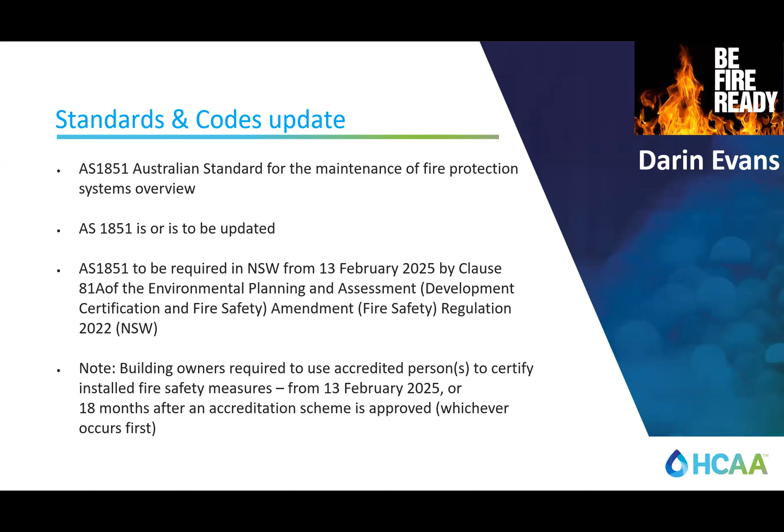I've also put a note in there. We're also getting accreditation of measures being installed in the building. Again, this only relates to the fire measures, but those fire measures will now need to be signed off by an accredited practitioner, which makes sense. At the moment, an accredited practitioner or the like needs to do the design of most of the fire safety measures in the building, and we do annual certification on it a year after the place has been completed. This one's going to apply to the one that occurs for the occupation certificate. I've got a couple of slides on what it means, and that's the little piece of the legislation coming out there.

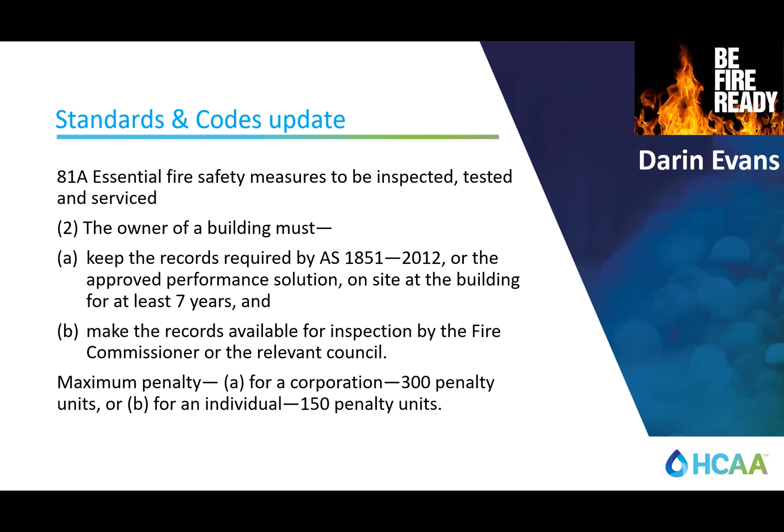So if there's a performance solution, obviously that goes over the top of 1851 to that extent as well. And you've got to keep the records, so people will be able to access those records for a 7-year period, most likely the fire brigade or an insurer, or someone looking at what's going on. And that's the final part of that clause there.

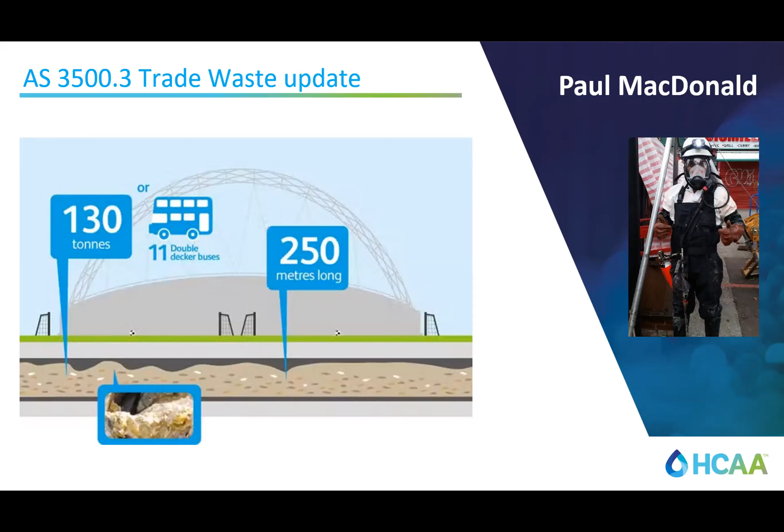And we should also be noting on our documentation that the contractor is responsible for all trade waste applications, as the information that is requested asks the type of plaster arresters being installed, the types of silt arresters being installed, and the types of grease arresters being installed, etc. And all this information is what the contractors would have on hand. I believe these items may end up on Dean Crowe's desk, but we'll see. That's a quick update from Paul MacDonald.

I'm going to ask Stephen to come up. So please welcome Stephen. Stephen's taken over from Rod temporarily, and Steve's going to give an update on education. Thank you.

Good evening. So I wouldn't say I've taken over from Rod. Rod is one that is very active in the education committee. So Rod put his hand up at the end of last year and asked for some help. He's been fighting this fight and pushing this slog for a very long time to get the industry up and running. And the biggest challenge has been for a number of years and still is a lack of teachers.

So our biggest message to the industry is we need more help. And if anybody is at all interested in teaching, then feel free to reach out to myself or Rod. We'd be happy to have a chat. My role, I'll be involved in just handling day-to-day inquiries and basic sort of first point of call.

In terms of an update, I work for a German company, so I thought I'd give an update with some statistics, which tends to go down well. The diploma course at the moment, we have 30 students that were enrolled earlier last year that are due to finish mid next year.

We've just put through another 15 for the Cert 4 prerequisite for the diploma, which will also finish June next year. Come July next year, there'll be a second class run for the diploma, so another 30 or so students will commence. But between now and then, unless we get some additional help or more teachers, which TAFE is working to achieve, that'll be the earliest the next cohort will run.

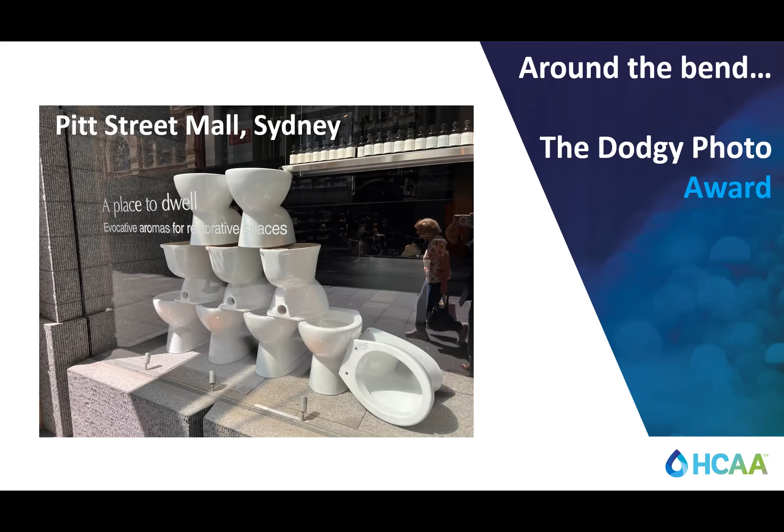And it also kind of leads on to this item here. I'm going to ask Mr. Matt Lloyd to come up for the next slide. So Matt posted this on LinkedIn. I think it was on, when was it? It was International Plumbing Day, wasn't it? World Plumbing Day, yeah, on Friday or Saturday. I'll hand it over to Matt.

Thanks, Paul. Yeah, it's kind of been thrown on me 5 minutes ago, but anyway, I put this up on LinkedIn and was actually surprised at the response, it's been pretty big. I kind of thought, I wonder how many people in the industry remember dealing with these, possibly even specifying them, Gary. But yeah, certainly everyone to a degree, and it was really interesting to see some of the younger people in the crowd come up and have a look at it.

Look, I'd like a few people to throw a guess at what they think that weighs, because that was the intent of my questioning on LinkedIn. There's been some close ones, but I can tell you 45 kilos was not anywhere near it. If you remember a 40 kilo bag of sand cement, that was quite heavy, but that's what we were throwing over our shoulders at one point. I sort of came in at the tail end of this, I can't be a champion of it really, but I certainly remember cracking beers on site, using 9-inch grinders and carrying these around, but PVC was certainly coming in, so the plastic guys will be pretty glad to hear that.

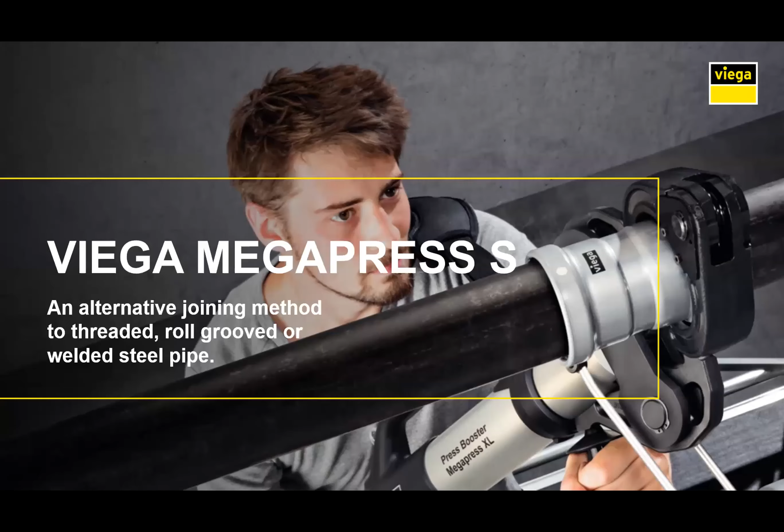3 minutes, me again. Emily and Paul told me I had between 3 and 4 minutes to present this, and those who know me know I can waffle on, so this is quite a challenge for me. I'm going to keep it short and sharp, or Paul's going to tackle me off the stage.

For this innovation segment, I'm presenting a new technology that Viega has launched in the market called MegaPress. It's a press fit system for carbon steel or for galvanised steel. I'm mostly speaking to those in the industry who dabble in fire, although we predominantly sell it for mechanical services as well. It's simply an alternative joining method to threaded, roll groove, or welded steel pipe.

As you can imagine, press fit is a lot quicker. So there's a lot of flexibility you can have on site using the jaws, nice and quick, and not as cumbersome in terms of labor and bolting, threading, machinery, etc.

We predominantly sell it into mech services and fire sprinklers. There's also some applications in shipbuilding which we get involved in, and potentially we could do hydrant systems, but speak to me about that first.

The way the system works, for those familiar with press fit, it's the same technology as your 100 mil copper. We have stainless steel grip teeth which bite into the pipe itself, and that's what provides strength as it presses the two metals together. There's a sealing element separated by a separation ring to prevent any sharp objects from damaging the seal. We have a full range of fittings from half inch up to 4 inch elbows, tees, couplings, and the body of the fitting is coated in zinc and nickel for corrosion protection.

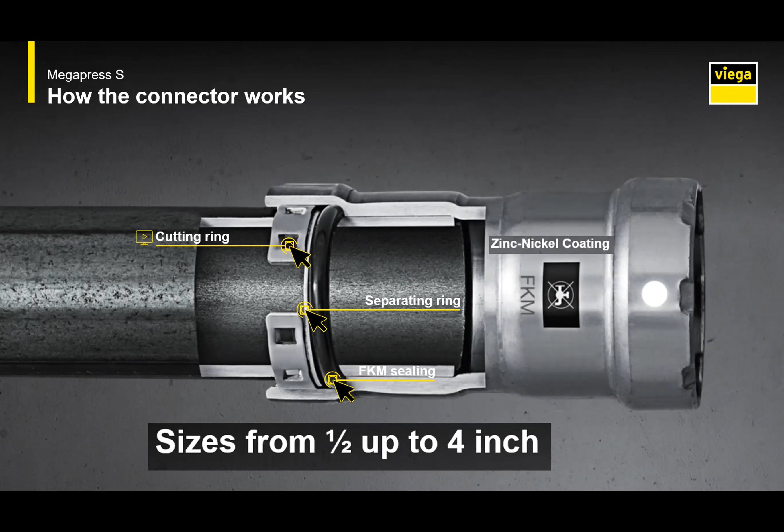With all our systems, Viega have leak detection. We call it the Smart Connect feature, but whether it's our copper, plastic, poly, stainless, or now carbon steel, we guarantee that if a contractor fails to crimp the fitting between a pressure range of 100 and 650 kPa, the system will visibly leak, and you're guaranteed not to miss that during your testing phase.

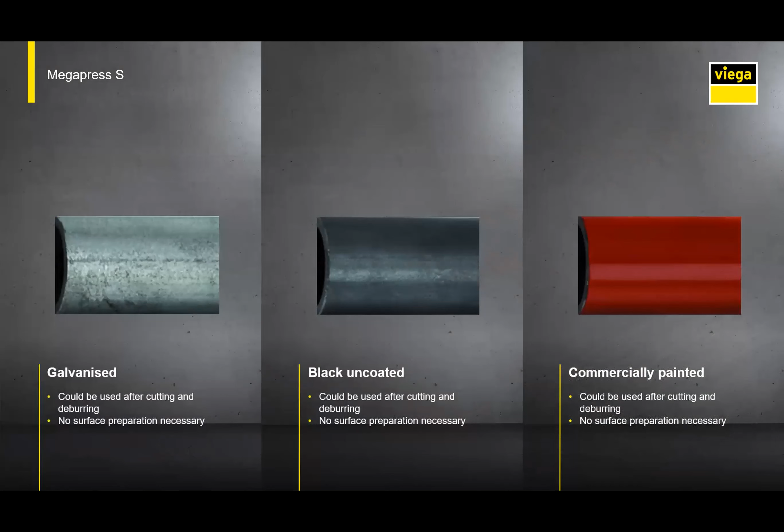It's a thick-walled system, so it is suitable for Schedule 40 mech services following the US standard or the Australian standard 1074 light, medium, heavy-duty pipe. Can be used on galvanised steel, black uncoated, commercially painted, or even rusty steel, so long as you appropriately clean it, prepare it, and file it back.

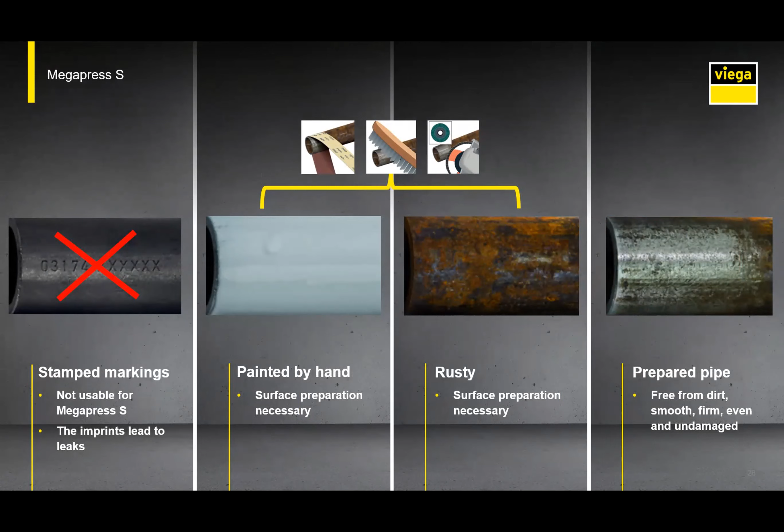And I said I'd be short and sharp. That's the system. I've left some samples over here. If you have any questions, that's me.

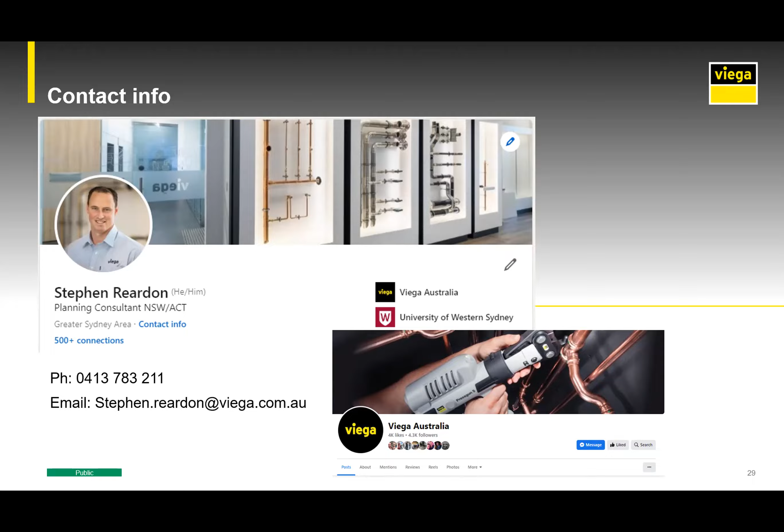Good evening, ladies. Four minutes. Four minutes, fantastic, get it cracking.

All right, thank you for the opportunity. Welcome to our first seasonal general meeting and dinner. I'd like to get straight into this presentation: the Geberit BIM system, building information modeling system.

You're all familiar with the Revit system by Autodesk. This system plugs straight in and is operated through the system throughout. It's based on the Swiss system, which allows any region, once you log in, to give you access to any online catalog, which will give you instant data on the products straight away.

I'll run a quick video for you. Keep it quick.

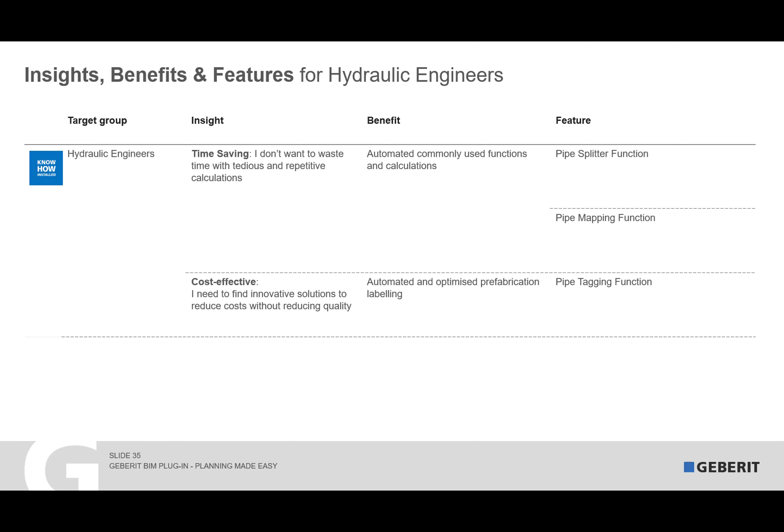So I'll finish on a video which probably will give you a bit better information.

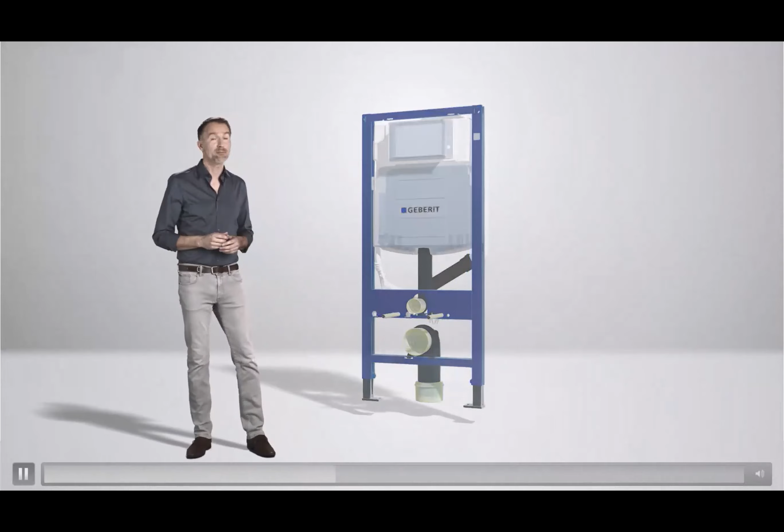Everyone is talking about BIM, and it's true what they say: networked digital planning in 3D promises all-round efficiency and excellence. Nonetheless, a huge gap still exists in many cases between theory and practice. We at Geberit are closing this gap with BIM now - not sometimes, somehow, but very much here and now. The complete array of Geberit items for your planning software, in accordance with country-specific and market-specific standards, with reduced practical data models and comprehensive meta-information available as required, naturally in standard formats in international use, to ensure easy handling of our data independent of systems and software. The Geberit plugin for Autodesk Revit provides you with rapid access to all Geberit products. This means you have all the essentials close to hand and in compact form, from the simplified model all the way to all of the relevant data once the planning is completed.

Theoretical and practical, simple and standardized data, useful standardization that is through building smart or intensive exchanges with research and economics institutes. We are on top of the situation. The future happens every day. BIM now.

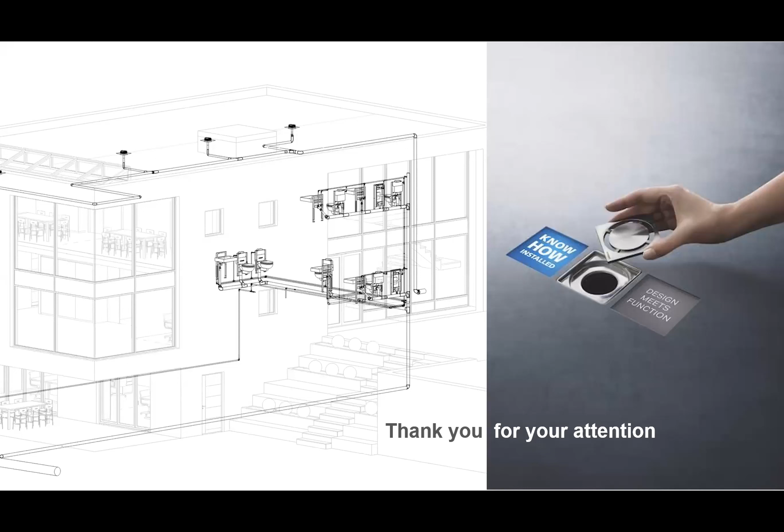So just in wrapping up, if you have any further questions, I'm here tonight with my colleague. If you have any questions, please come and see us before you go, as time is of the essence. I'm more than happy to come out and show you one-on-one or for your groups as well. So thank you very much for your time.

Fantastic, John. Thanks, Scott. So again, just to reiterate what I said before, if anyone's interested in doing this, we're going to have probably 2 or 3 at each meeting. So it's an opportunity for all the affiliates to get involved and for our consultants as well.

So I'm going to skip. Oh no, we're not having anything to eat. So this is before we have something to eat. This is all about, again, the benefit of the affiliates. And the question that I posed here is, you're passionate about your role because of what? So everyone get up on their feet. All together now. And we want everyone to mingle a little bit and just tell them quickly, in that 30 seconds or a minute, what are you passionate about and why?

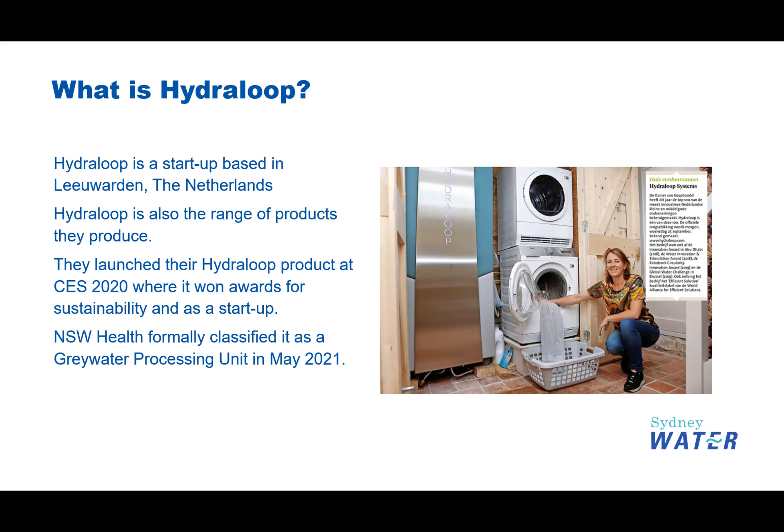Neil Shaw from Health picked up the water quality analysis that they'd done in Germany to comply with the European grey water equivalent standards. And he very quickly realised that this is a big game changer in the industry. It was a totally novel approach to grey water treatment. And he coined a term, grey water processing unit, GPU. Just remember that, I'll come back to it later, but that was a very clever move of his, because there's no such term in the Australian standards. He recognised that the Australian standards do not consider this approach.

So when Sydney Water got interested, first thing, my background is all in water efficiency. I've spent 25 years at Sydney Water running and developing water efficiency programs. So I'm not a plumber, but I interact with plumbers on a regular basis. One of the programs we run, Waterfix, has employed 60 plumbers for nearly 20 years, fixing taps, toilets, showers and leaks in households. So we actually have a fairly big plumbing business, and we trade probably $8 or $9 million a year in that Waterfix service. In the first 18 months we did 127,000 houses, in the middle of the millennium drought. Anyway, so that's my background.

But first thing we did was look at our end use study. We've got about 200 houses that are on high frequency metering, so 15-second meter reads. So we can work out the end uses in the house. We get a trace for every shower, every tap use, every basin use. We use Griffith University to put it through an algorithm that can split the trace up and work out what is what in that very complex trace every 15-second reading.

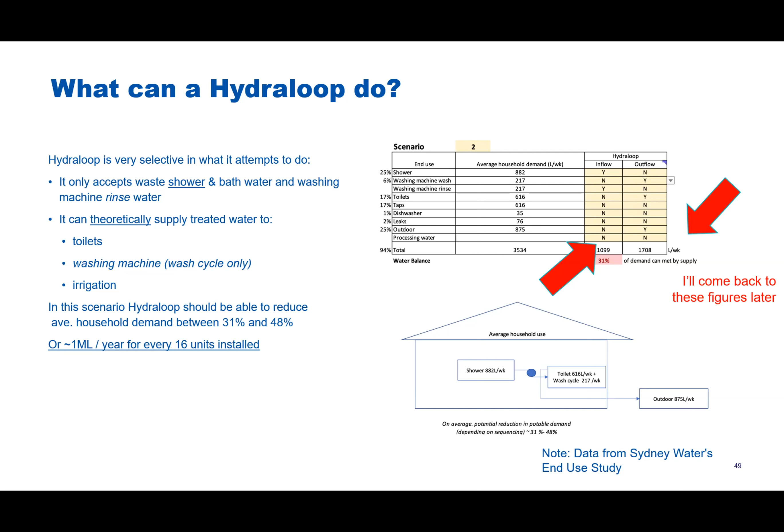Okay, very few moving parts, very unlikely to break down. Fully biological process, no filters, no screens, no chemicals. So it's a bit of a game changer. It's a pretty simple process, and I'll start drilling into exactly what it does.

But the first thing for this room is the plumbing is quite different, and we're going to have to slowly change the perspective of how household plumbing is done if they're going to be recycle ready, is the term that Hydraloop have used for equipping a house ready for this to be connected. The shower water, for instance, has to be separated from the floor drain, the toilet, and the basin in the bathroom. Shower and bath should be separate and brought down to the position where the Hydraloop is.

Toilets, just like rainwater tanks, the toilets are supplied by the Hydraloop, not by mains. And there's an irrigation outlet, and I'll get to how this works as well, but there's a Hydraloop irrigation path from the Hydraloop as well. So there's 3 outlets. And sorry, the second one is to a washing machine. It will service the washing machine as well.

Underlying feature, and again, this is why Neil Shaw distinguished Hydraloop from anything else, is it sits in the home. It utilises the thermal envelope of the home. So the warm shower water and the fact that the houses sit around 20 degrees accelerates the biological process. It's not in a hole in the garden or outside. Therefore, it's designed to have a permanent connection to the sewer. It sits on top of a sewer connection, and it has a backup water supply, which can be rainwater or mains.

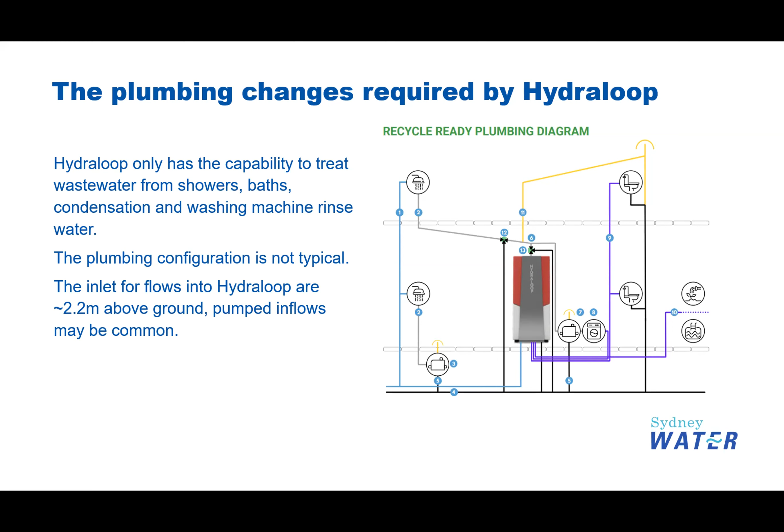Water quality is surprisingly good for such a simple system. It's very clear. The process does not remove salts, is its weakness. That's why it's still only a grey water treatment system. It's not a black water processing or treatment system. It's only ever going to be good for washing machine wash cycle, toilet flushing, or irrigation. It's full of salt. Biological load is right down to the minimum. But there is going to be a small biological population, so you can't just put it back into a rainwater tank and leave it in storage, because eventually that will bloom.

The process is there's 2 tanks stacked on top of each other with a central column as well. There'll be some photos of the Hydraloop later in the presentation, but essentially you've got a total capacity of 300 litres, top tank 180 litres, bottom tank 120 litres. Most of the processing happens in the initial column. There's a lot of screening and aeration that goes on to reactivate the soaps in the detergent in the wastewater, and that starts a process which is called foam fractionation.

So basically, anything that's even quite microscopic, but certainly anything quite large, actually floats to the top, doesn't settle to the bottom. There's a lot of aeration happening in this central column. And there's just a really simple, non-movable sloped surface at the top of the inlet funnel, and it's got the bypass to the sewer. So anything that can be carried by an enormous amount of bubbling, there's aeration pumped in at the bottom, is carried upwards and skimmed off naturally. It's not a moving part. It's just the design of the inlet funnel, basically.

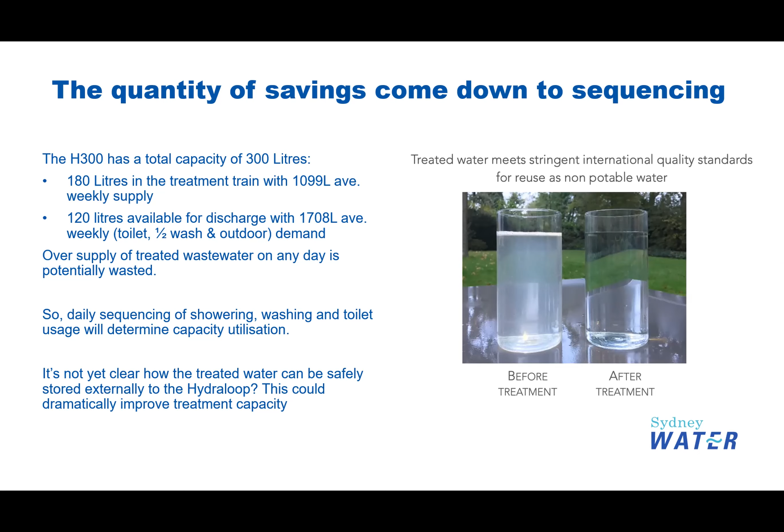New South Wales Health published Ad Note 7 in response to Neil Shaw's evaluation. It's available on the web. The distinction is that the Hydraloop or grey water processing devices, of which Hydraloop is one, don't produce biosolids. It's got that direct connection to sewer, so it's inherently fail-safe. It's not an end-of-line system like the old septic tank conversions and so forth.

This is in the house, sits on top of a sewer connection. So any failure, catastrophic failure or anything, just goes straight to sewer. And it's got a backup mains supply or rainwater supply. So even if there's a mechanical failure in the bottom tank, mains supply will take over.

Being Sydney Water, the story is that one of our GMs saw Hydroloop's press after the CES, and I got the task of importing 30 of the units, so a container full of the units, 30 fit in a container. So we have 30 in the country since the middle of the pandemic. Basically, it took about 9 months to get here because of the disrupted shipping.

And during that time, we engaged our internal lawyers to do a canvas. What regulations do we have to comply with? Very quickly, we found it cannot comply with any of the existing grey water treatment or processing standards. One of the key terms you have to comply with is the lid must be trafficable. This thing sits above ground in a house. There's no way it's going to have a trafficable lid. That's among many other aspects of the existing standard that we can't comply with.

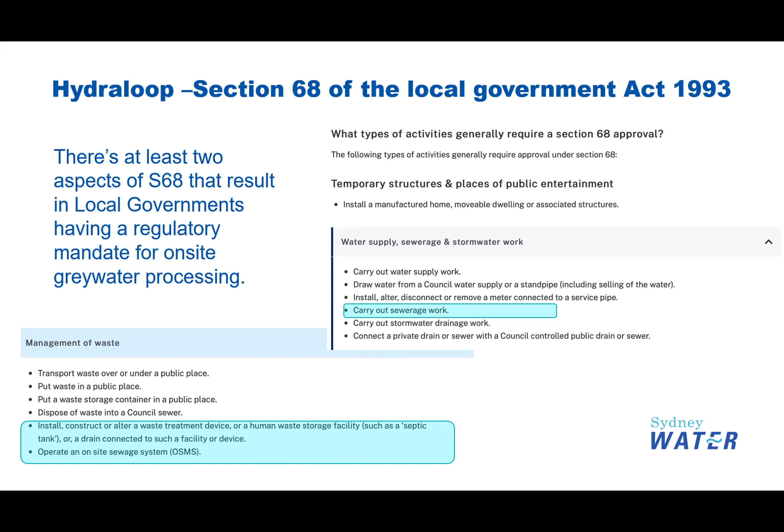Yet the water quality results exceed the requirements of the existing standard. That's really where the rubber hits the road. But we also get pulled up in the Local Government Act in Section 68. So eventually in the future, local governments will be the ultimate regulator, not Health or the EPA in New South Wales. In Victoria, the EPA take carriage of grey water, and in New South Wales, Health take carriage of grey water. So we don't know what the outcome will be in Victoria yet.

Something I'm sure you guys are well aware of, but I certainly wasn't when I started this journey, is we had to commence our trial, and it's not a WaterMark product, it won't fit into the Australian standards, it's not recognised, there's no pigeonhole for grey water processing devices to fit within the WaterMark. So we have to go back and reinvent the wheel and start that process from the beginning.

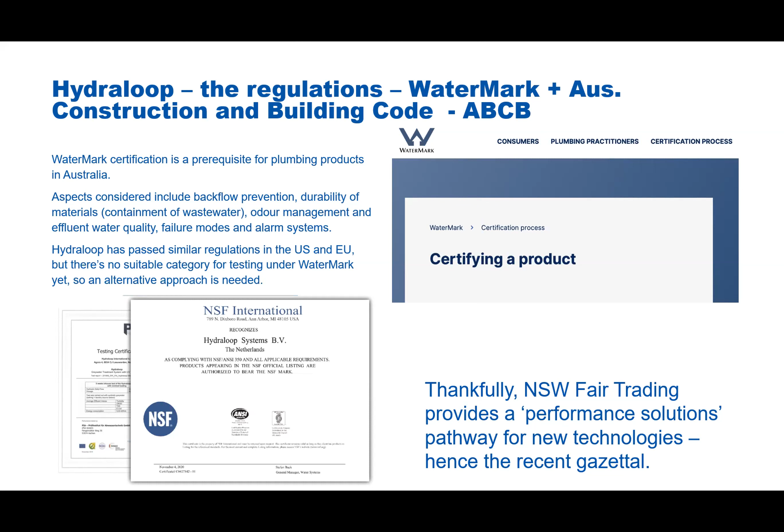Thankfully, the existing 1540-something standard for grey water treatment systems was up for its 10-year mandatory review anyway. It was 9.5 years old. So I've got myself on that committee, and we're slowly working through updating that standard to allow grey water processing devices. So we went down the path of a performance measure, and we got Gazettal. I'll skip through this. We got the Gazettal on the 4th of November last year. So that was like a 9-month journey getting that approved by Fair Trading.

Last bit of regulation is in Sydney. AS 3500 says that if there's a backflow device within the unit that's compatible with the hazard it presents, as a medium hazard risk as defined by AS 3500, and Hydraloop included an air gap device which is suitable for that hazard. AS 3500 says if that exists within the unit, then you don't need upstream backflow prevention.

But Sydney Water says if you've got any grey water processing on site, you need testable backflow RPZ. So this is a bit of an unfortunate policy mismatch with the standards in Sydney Water's area of operation. So it means there's roughly a $300 annual testing regime that householders will have to put up with until I can convince James to change his policy.

This is a couple of photos of the air gap device. The left-hand shot is sort of an overview of the guts of the Hydraloop. This is where the pump is in the bottom left-hand corner, the UV lamp on the top right, the vertical system. The grey pipe across the top is the bypass to sewer. There's also some solenoid valves and so forth you can see in there. And the air pump's kind of stuck in.

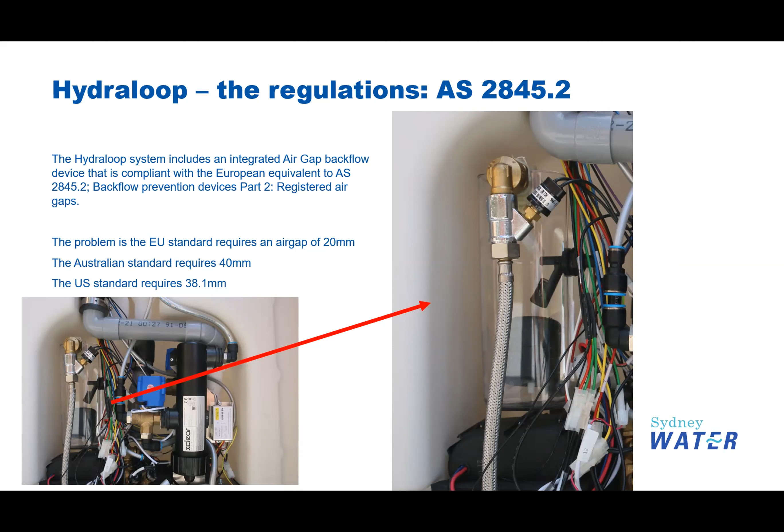So Hydraloop are busy going through the process of getting their air gap device certified under 2845. So we're slowly building the bridges to get it compliant with a future WaterMark certification. A couple of photos of the inventor.

So Arthur Valkieser and his wife Sabine came out to Australia in October last year. Arthur's a serial entrepreneur. His first big break was when he was in his 20s. He invented a communications device for aircraft that is the last thing if you've got a complete system failure in any aircraft, whether it be a fighter plane or a commercial plane or a Cessna. If you've got complete system failure, his little box, installed in every single plane that's ever flown since the 1960s, will guide you via radio waves to your nearest airport.

He's a self-made millionaire because he's the inventor of that. He still produces every single one himself in his own factory, and he gets all the royalties from that. Not a bad gig. So he didn't need to invent Hydraloop. That's the point of all that. He did. It's a bit of a passion project. He saw wasted water as an issue, and this is in rainy Holland, northern Holland. And so it's a very well engineered device. He's an engineer by heart. Very simple design, very impactful in my view.

We proceeded down the path of getting some installations underway. None of these have been fully inspected yet or anything. They're not functioning yet. They just got early commissioning stages. We've got some social housing projects. We've got 2 houses in Willoughby, a passive house in Queen's Park. Eventually we'll have 30 installed.

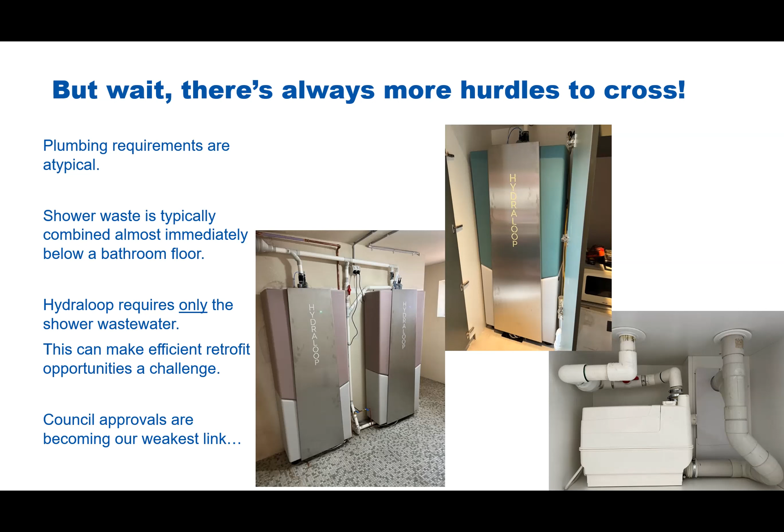I live in an 1850s terrace and it's before plumbing. And so all the plumbing is outside the building, inherently easy to untangle that plumbing, and I'll be installing a Hydraloop in my place. Any kind of major renovation typically involves bathrooms or kitchens. And so once they're being replumbed, it's relatively easy to sort the plumbing out.

One of the more interesting ones was a social housing project in Glebe. This is on Bridge Road, Glebe, just up from Glebe Point Road. This was all done during COVID. I don't know whether you recall, during the lockdowns, all the homeless men and women were put into hotels to keep them safe off the streets. And as the lockdown started winding back, there was a concerted effort to find homes for all these previously homeless people, with mental illness, all sorts of issues that caused them to be homeless. This was one of the solutions.

So various agencies had bought dilapidated properties, upgraded them, and this building here is 30 units, 30 studio apartments. It used to have communal laundries down in the basements. Part of the renovation of this building was to convert one of the bathrooms in the studio apartments to a laundry bathroom. And so the communal laundries down in the basements were available. And of course, all the drainage used to come down there to that level anyway.

And these walk-up units, of which there's roughly 35,000 in Sydney, their slabs are so thin, I'm sure you know this, the plumbing goes straight through and hangs underneath the slabs, just in a duct in the downstairs person's bathroom. So you take that duct away and you can untangle the plumbing, separate the showers from everything else. And that's exactly what we did.

So this building now has, and what's unfortunate, it's on a bit of a hill. So there was only the basement on half the building, under 15 of the 30 units. So we're only servicing half the building, unfortunately. But we've got 4 Hydraloops servicing 15 units, half the building. And again, they're not fully commissioned yet, but they're in place and plumbed in and ready to go.

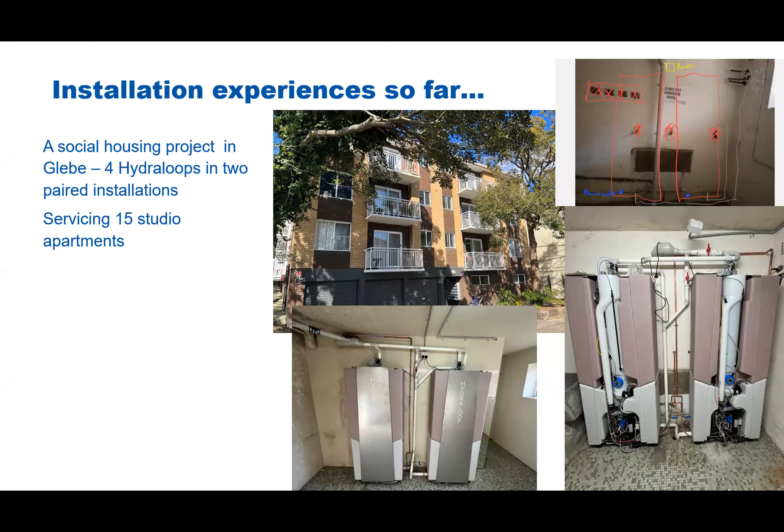We're still waiting on some final council approvals.

This is just some photos of the passive house in Queen's Park. Very complex build, ventilation systems going all over the place. In this case, the Hydraloop was chosen to be installed in the attic. They didn't want it taking up cupboard space downstairs. It's a Federation era house, so 1900s and 1910s.

So they've got a pump there for wastewater. They've got a little DAB lift pump in their laundry, lifting their shower and washing machine water up to the attic, and it's accessed on the very left.

This is the child's bedroom, through his wardrobe. There's a little hatch at the back, and that's to an attic space, right? So that's how you get to the Hydraloop. It's the most compact place possible.

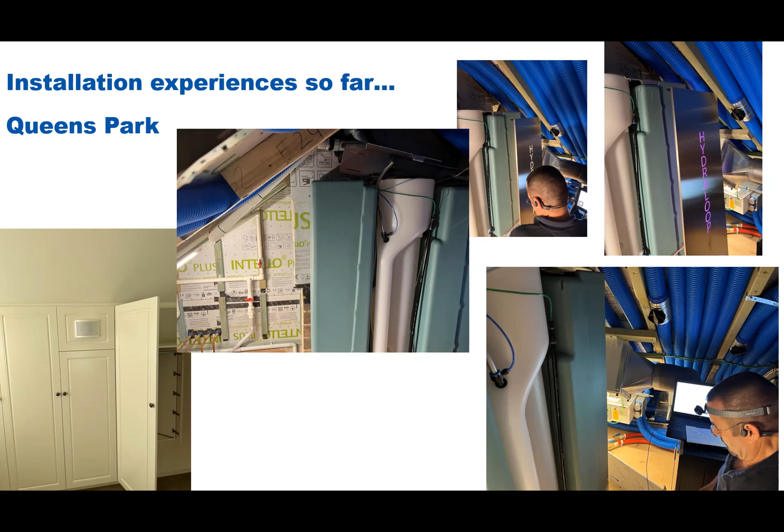There's another one in Willoughby, an outdoor installation that will be built into a cupboard. I've just shaded it in purple, roughly where it'll be. This was an old 1930s, 1940s house, double brick, but they're replacing both bathrooms, so it's inherently easy to retrofit the plumbing and the laundry. So this will be another retrofit.

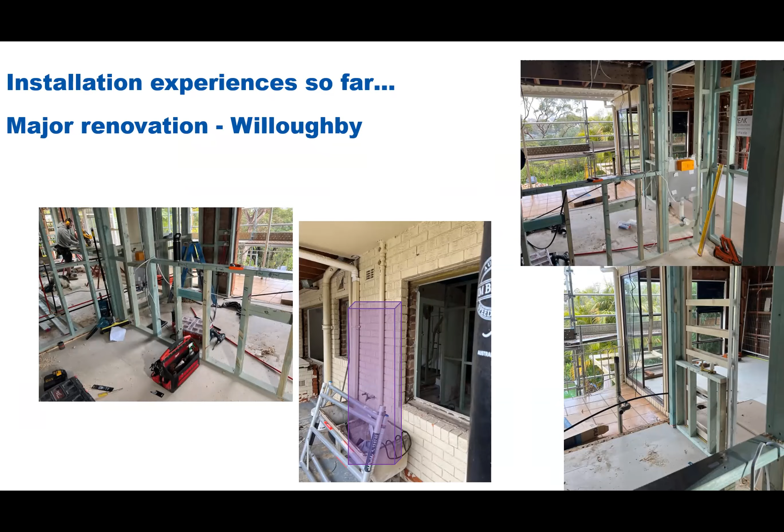And when you think about it, Hydraloop have always chosen the cleanest, biggest volume grey water supplies in the house. They're not trying to get kitchen wastewater, or the basins. They're just getting the high volume, and also the temperature - the warm water is what helps drive the biological process quickly.

There's a process called foam fractionation, which is really adopted from the pharmaceutical industry. It relates to foaming, but it's that biological process already breaking down in the first seconds because of the foam. Then the big tanks really are aerobic bioreactors, oxygenated water. There's air going into it all the time via a little aquarium pump, and the bio balls are serrated just like tennis balls, with a really rough surface area, but they're hard plastic. The idea is the surface area gives maximum surface area for biological activity to take place. So it's just a warm, highly aerated tank, and biological activity is going to take off.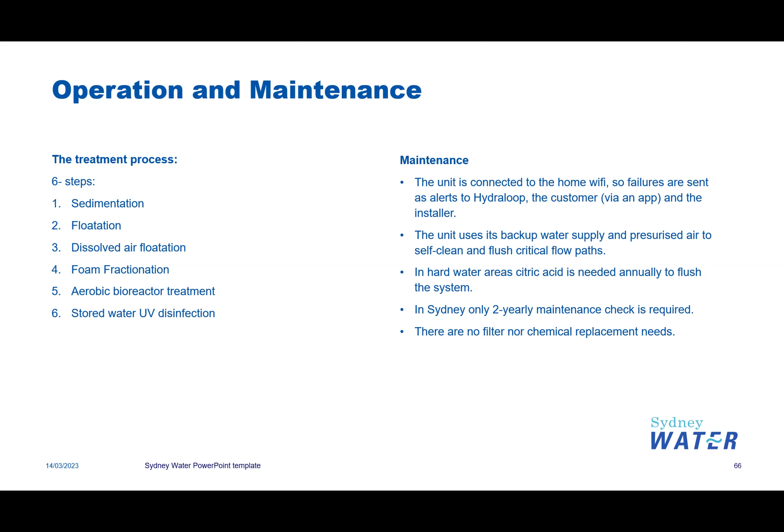The other key attribute of Hydraloop, and this is really where the rainwater tank industry needs to learn, compared to any other onsite or decentralized treatment system, is that it's connected to home internet. So the consumer gets an app, and we get a view of what they call a Hydraloop device manager, which is a global view of all the units installed.

There's about 60 sensors in each Hydraloop, so you can see all the levels, all the flows, any sort of fault diagnostic. Everyone gets alerted - the installing plumber, Hydraloop back in Holland, and in our case, because we're running the trial, Sydney Water will see the status of these units as well. The customer obviously will get a notification if there's a failure.

Last slide - there's always been a question of what's the energy use. There must be a downside somewhere, and it does use a bit of energy. It's got a UV lamp, aeration pretty constantly, and a DC pump. So that equates to - and where I've got the data from, Hydraloop haven't been particularly forthcoming with the energy use, I don't think it's something they've considered seriously.

But when they did the water quality testing in Germany, it had to go for a 5-week test period, just like the Australian standard requires a 12-month test period to evaluate it over time. During that 5-week test period - this is a copy of the certificate from the German lab - it used on average 0.55 kilowatt hours per day. Translate that over a year, it's 200 kilowatt hours... sorry, for an average household, that's about 11% of household demand. So it's not insignificant, but it's not a major use.

Those of you who were here for the last meeting, a geotech colleague of mine, Jason Bauer, gave a presentation about the characteristics of soils and what determines reactive and unstable soils, which was a pretty informative precursor to this new appendix that's gone into AS 3500 Part 2 last year. That appendix is pretty much a section of another standard, AS 2870, which has been around for quite some time, and I've been on two previous committees trying to get that information brought over into AS 3500. Finally, the last committee that had a crack didn't quite get it into the normative section, but it's in there now as an appendix.

So tonight I'll focus on what is in that appendix. But just before we get there, as an introduction, the problems associated with reactive soils that move, not just from a plumbing perspective but a construction perspective, is pretty huge.

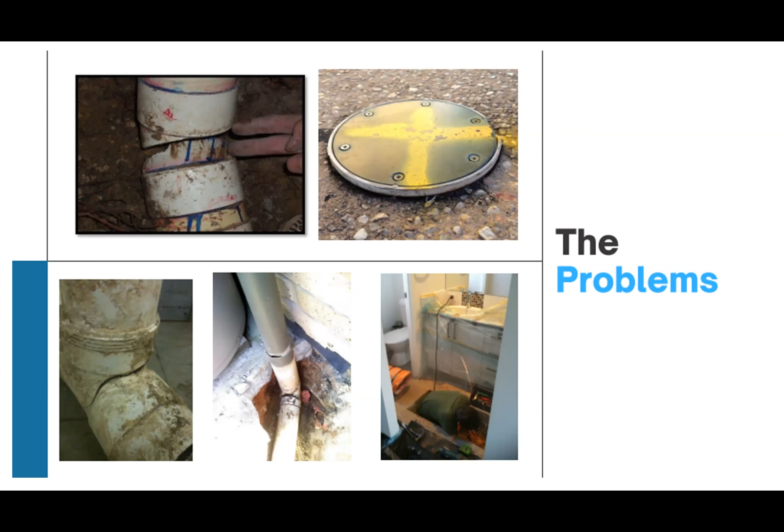This is a good example. Where I'm from in Queensland, we have the QBCC, the Queensland Building and Construction Commission, the state's watchdog. When things go wrong, the homeowner complains to them, and the first thing that happens nine times out of ten is they send a camera guy out to camera the drain. This is when the homeowner complains about cracking walls, doors that can't shut, and those usual signs that a structure has moved.

I've been working with one company, Ben Theslow from BT Plumbing. He's been the camera guy for the QBCC for 15 years, and he's provided a great deal of really good data which has helped us develop products in this field. This particular example is a block of 13 townhouses on the north side of Brisbane.

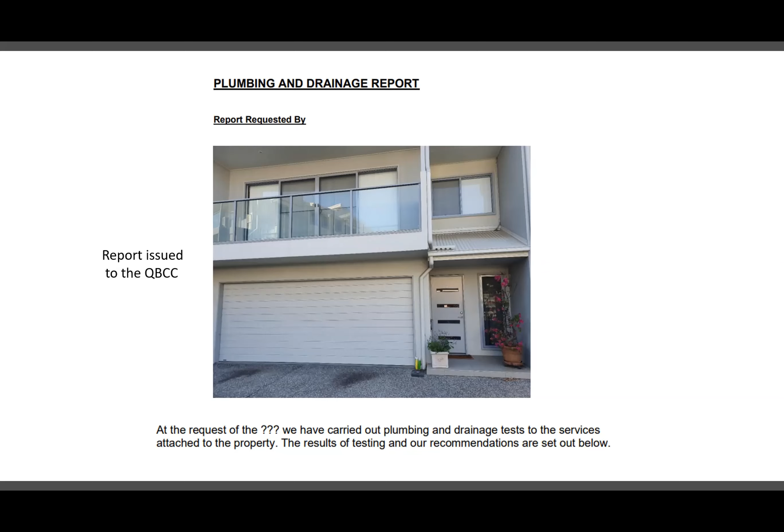Construction date was about 2017, and homeowners started making complaints two years later. In 2019, Ben went out and cameraed this drain. I'll go through this quickly, but this is the same report he issues to the QBCC. He always does the stormwater drains first, and downpipes were obviously broken out the front of the building.

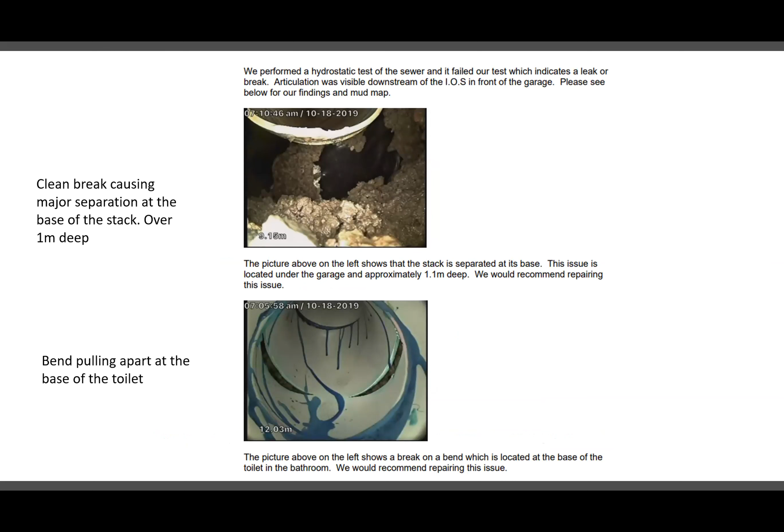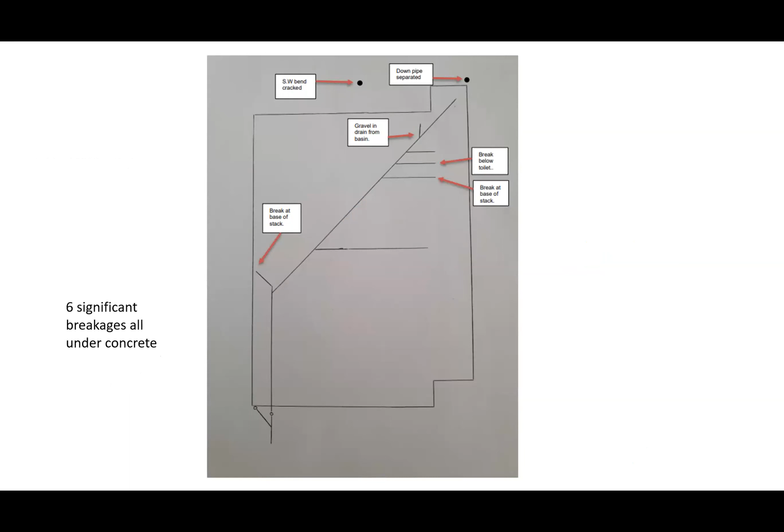There's an ORG there, and that's the mud map he did for the first townhouse. There were 6 breaks in that one, and I'll quickly go to the next adjoining townhouse.

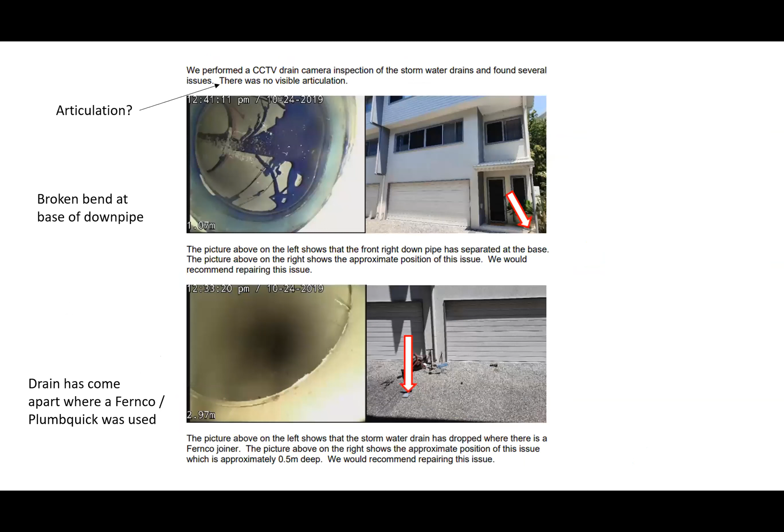These are 3-story townhouses, same sort of story. You've got the stormwater at the front with breaks, the stormwater at the backyard with breaks at the base of downpipes, then going inside the house, significant breaks there as well. Some of these depths are quite deep, 1.1 meters - for ground to get that wet, that deep, that's a fair way down.

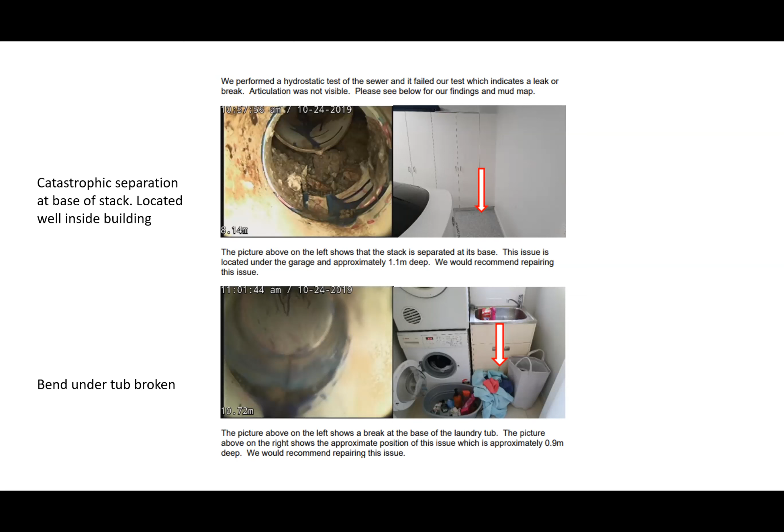There were 11 more townhouses to do on this lot, and it was the same story every single one. I need to follow up with him on where this was, because it went to court, but at the time he said there were probably only two things to do: excavate underneath every slab to a height someone can get under there and replace the plumbing, or bulldoze every single townhouse.

And Ben's got 12 guys working for him full time now, so this sort of work is keeping him very, very busy.

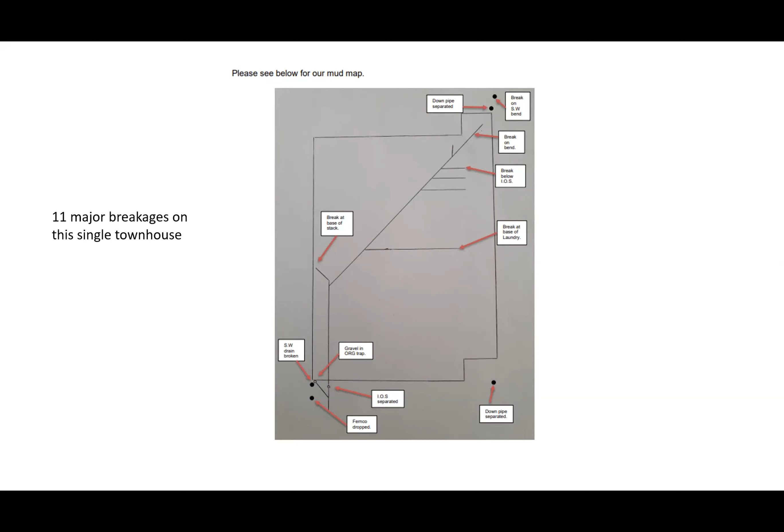So just Appendix G, a little bit about the scope. It applies to residential buildings, which I know isn't our cup of tea here, but realistically a drain's a drain. So whether it's a house or a medical centre or a childcare or a school, the way we do the plumbing is exactly the same. So if the soil moves for one drain, it's going to move for another. It doesn't provide designs for P class, and I'll talk about P class.

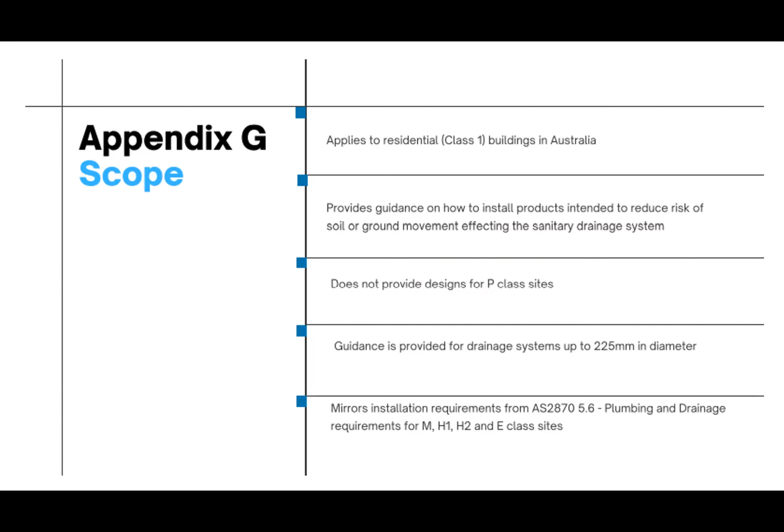It's for drainage systems up to 225, and it basically has taken a lot of what's in AS 2870, which is the footings and foundations code, and has brought it across into the back end of AS 3500. So what is reactive soil or unstable soil? In Australia, it's predominantly clay, and we're building on more reactive clay now than ever before, particularly as we build more west.

So we're getting away from the sandier type soils that drain really well, and we're getting into clays that we used to farm on, and they're great for growing things, not so good for putting slabs on, unfortunately. It's also about uncontrolled fill that's been brought on site or taken off. It deals with mining subsidence, and it deals with settlement as well.

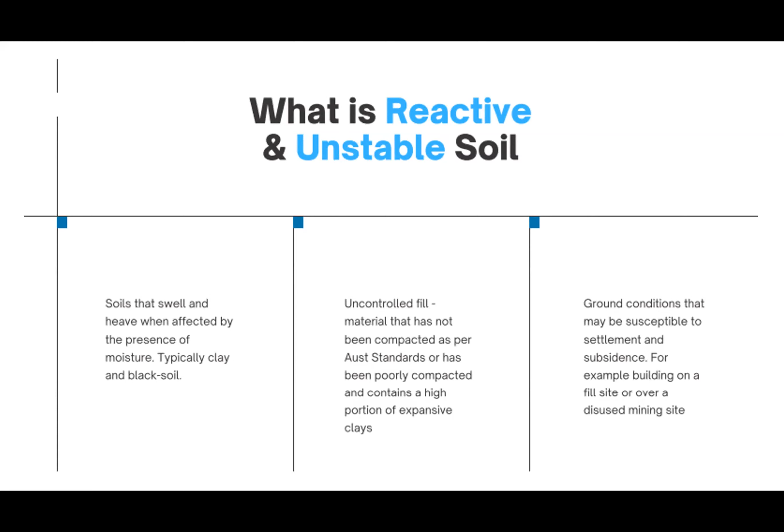So Jason explained this last year, but this is his job. His guys go out there before a job's even started, and they take soil samples. It differs from state to state. Back home, each individual block needs to have 2 or 3 soil samples taken, whereas in this part of the world, a soil sample can be taken on the whole site. So there might be multiple blocks on that site, but only a handful of soil samples need to be taken, which doesn't necessarily provide the best information about how reactive that particular site is, whereas in other states, it's more site specific.

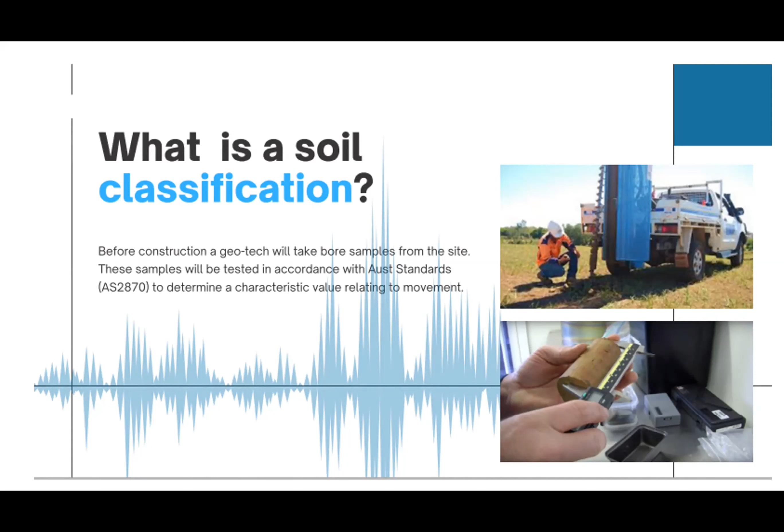So generally most boreholes are about 1.5 metres deep, and they take sections out of that. They'll put sections into an oven and cook it, and then add moisture to other sections, and from that, they will arrive at a soil classification. So every decent geotech report will have this in it. And from a plumbing perspective this is what we really need to know, because we need to know what we're dealing with when we're laying a drain. A, S and M are pretty good, as you can see.

Appendix G really refers to everything from H1 onwards. So H1 is 40 to 60 mil movement, H2 60 to 75, and E is 75 mil plus. H used to be one category. A few years ago, they separated it into two, which I wish they would have done with E, because E is 75 mil plus. To give you an example, I had a plumber call me not too long back, and his geotech report said he was working in ground that was going to move 200 mil.

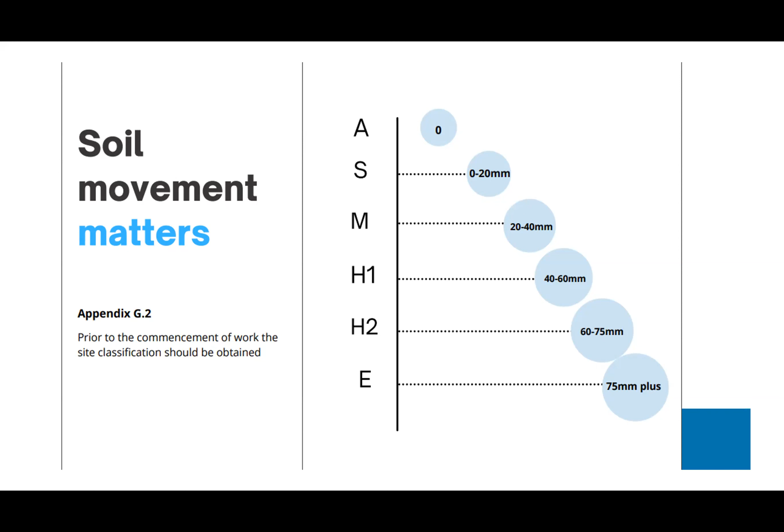It's funny, they can make slabs to withstand that sort of movement, but our PVC plumbing systems really can't. So E should have been split into E1 and E2. Maybe E1 might have gone up to 150 mil, and then E2 would have been an open-ended category.

Just on P-class sites, anyone who comes across Ps tends to panic and think that P means problem. It really doesn't. There's only a small percentage of P-class sites that are really a problem from a plumbing perspective. Really just stick with what the soil classifications say, because it's as simple as this. Most sites are classified P because there's a tree on that site. So how many sites would have a tree on it?

A lot of them. How many sites would have an old shed or something that's going to be taken off that site? How many sites are going to have fill brought on or taken off? So all those sorts of things will characterise that site as a P-class site. It doesn't tell you necessarily how much the ground's going to move. So generally with a P-class site, ignore it. Somewhere else in the geotech report, it will say exactly how much that ground is going to move.

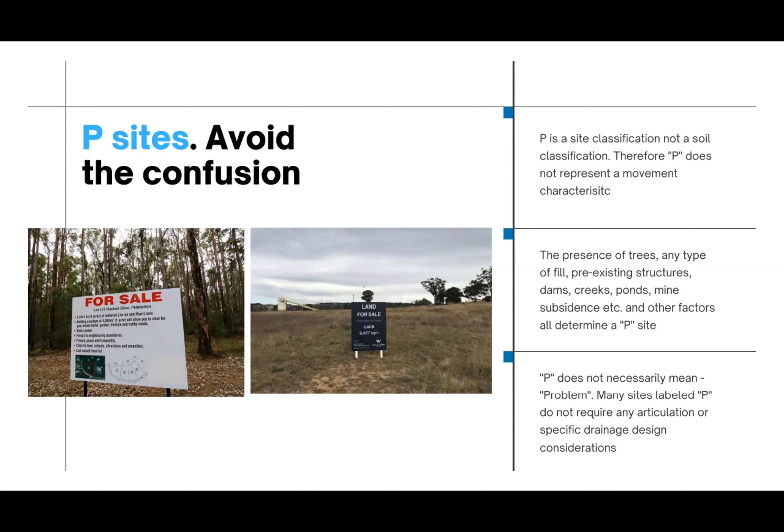So it's all about moisture at the end of the day, because it doesn't matter what the classification of the ground is. Like I said, that site that I was going to was characterised 200 mil movement. If it doesn't get wet, it's not going to move. It only moves when it gets wet, and then obviously in reverse to that, it moves when it has to dry out as well. But if there's no moisture in the ground, you're not going to get the movement. So that's important. They want to avoid things like this.

A trench that's been left open overnight, it's filled up with water. So right now there's just moisture wicking underneath that slab. If that was a H1, H2 or E class site, you wouldn't want to be the homeowner of that slab, having water getting inundated underneath it. Same around the site itself. And this is where builders need to be more vigilant in keeping the site dry. He knows he's on a H2 or E class site. So it's all about keeping moisture away from the edges of the slab, because that will get under the edges. Where's most of our plumbing located, particularly in residential jobs? Right on the edges.

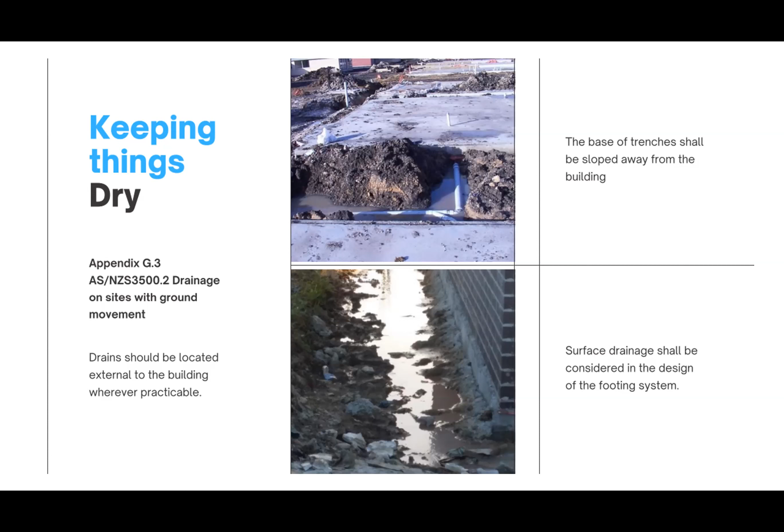So Appendix G starts to talk about clay plugs. And I'm not sure if many of you have heard about clay plugs, but they have been around in other standards for quite some time. They're referring to a product called bentonite clay. Bentonite clay is used in many other industries in Australia, mining and agriculture being the two biggest. But it's extremely effective at ensuring that moisture doesn't pass from point A through to point B.

If you were to have a glass here and fill it up half full of bentonite clay and then pour water on top of it, you'd come back tomorrow and the water would still be sitting there. So it's extremely effective at doing what they wanted to do here, which is they've asked for you to basically build a dam wall right at the edge of the slab. So this is for typically slabs like those waffle or floating type slabs, where your pipework is not exiting through a footing, it's just exiting through open ground. And you're coming through an area where the ground will predominantly stay dry underneath the slab, and you're coming into open ground that's going to be affected by rain. And they want to basically have a dam wall there.

They also say you can use concrete, so you can form up a concrete wall, and you can also use plastic as well. But what we see out in the industry is bentonite clay being used, simply because from a plumber's perspective, it's easier than forming and pouring concrete, or duct taping plastic around pipework that's penetrating it.

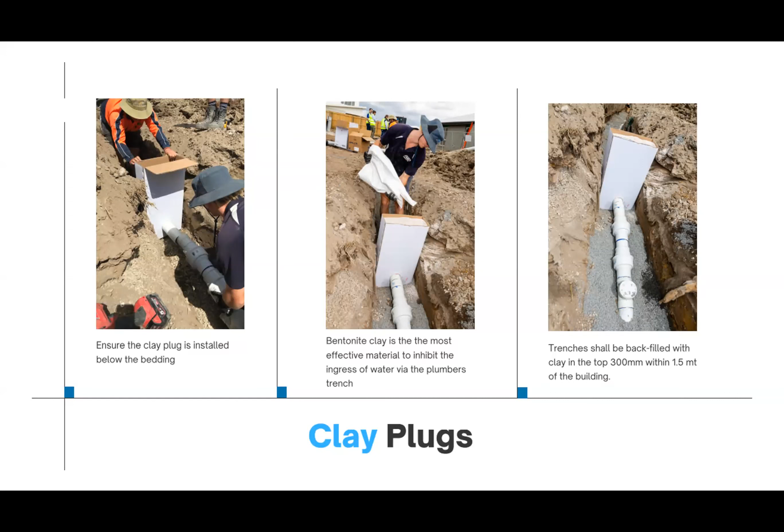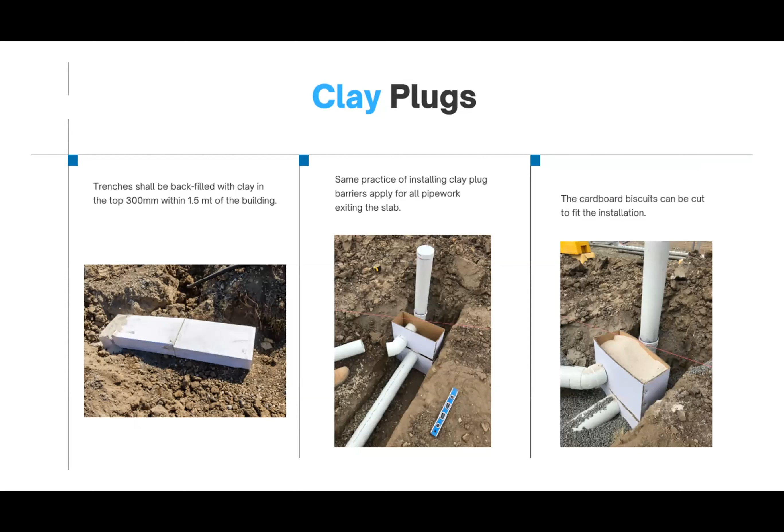And then you can see the articulated joints that they've used immediately on the other side of where the slab's going to be. And there's your horizontal pieces going across the top, 1.5 metres. Appendix G doesn't mention the top of the drain, but it's just common sense if you're using it where your pipework exits the slab at the bottom of the drain, why not put it at the top of the drain as well? A good example of how effective bentonite is, this is probably the biggest bentonite plug in the Southern Hemisphere, which is the Newcastle Steelworks job.

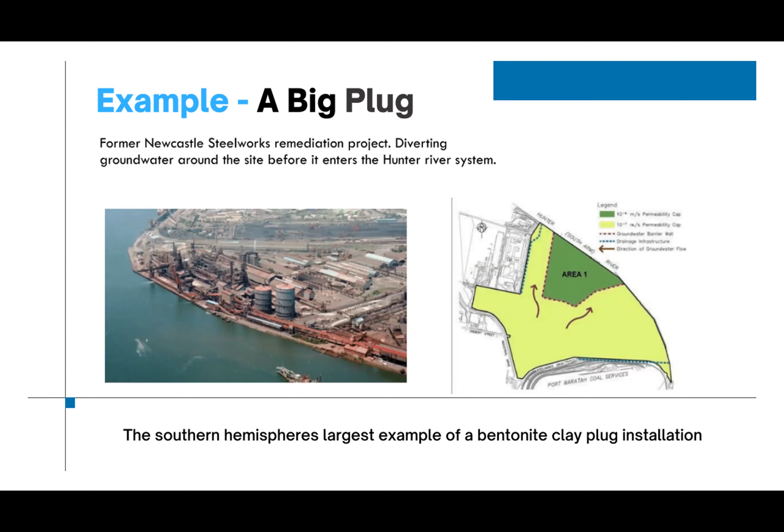They weren't sure what to do with this after removing the old steelworks from that site. It had been there a long time and they were worried about contaminants leaching out into the Hunter River, and they were going to actually concrete cap this job. Instead, they opted to use bentonite clay, in a similar way that we use it in plumbing. But it's a big one.

They went down as low as almost 50 metres. The whole length of the wall is 1.5k, and the wall itself is not even a metre wide. But as you can see, they've gone down and they've gone across. I've not been to that site, but I've been told they've now put parklands or something over the top of that for the public to use, and that there's monitoring stations out in the river, and they reckon that the results are proving to be very, very good.

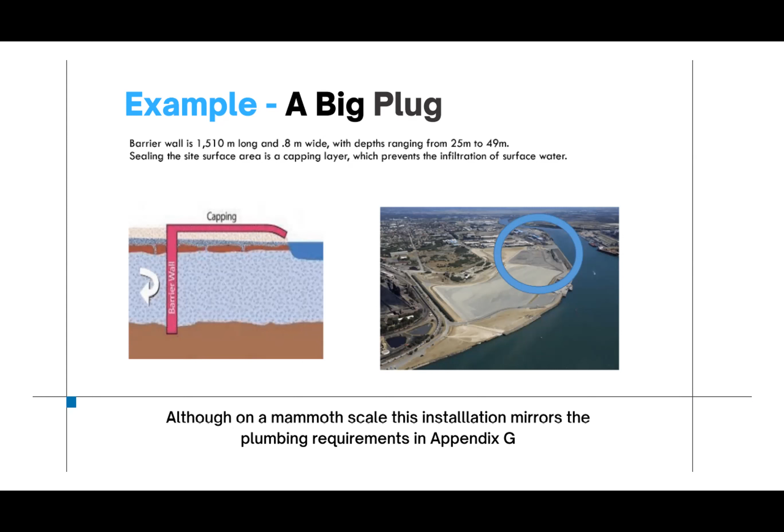So that's a big example of what Appendix G talks about using in plumbing. So when you hear the term flexible joints or articulation, primarily this is what those terms refer to. They're talking about joints that can move or provide movement in every possible direction. So when you looked at the classifications at the start, say you had a H2 site and you know you need to get maximum 60 mil of movement, you've got to ensure that these joints that you use will provide 60 mil of movement.

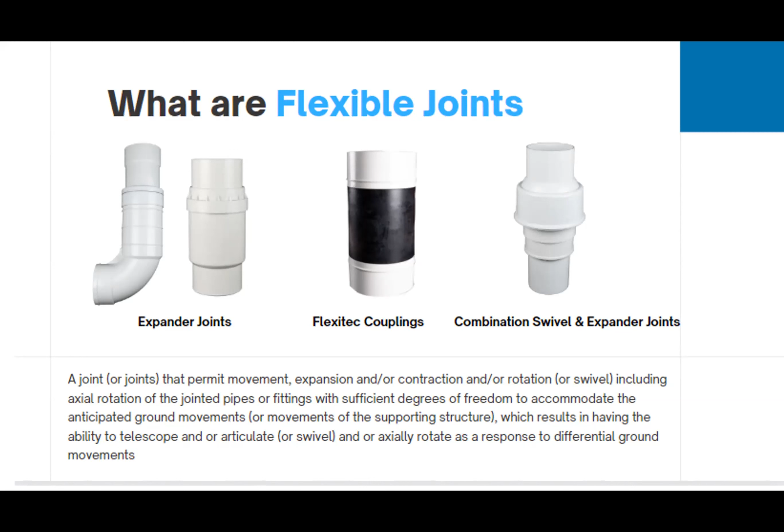So that's it. They've all got to have an internal stop. In the old days, the old expander joints used to pull out. When they'd reached their full travel, they'd actually come all the way out, which was no good for use underground. Obviously great for stack work, but not good for plumbing underground. So the standard got changed and all these things need to be made with an internal stop.

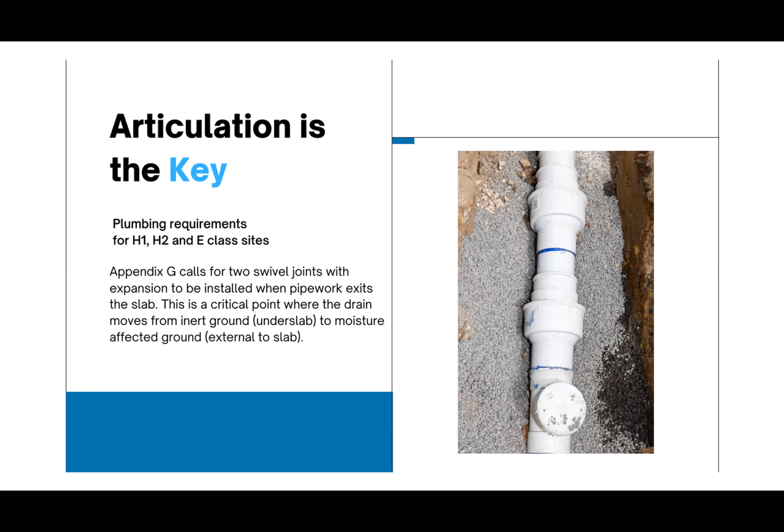So articulation is what Appendix G calls for, and the most important part of where articulation needs to be installed, and remember, we're only referring to H1, H2 and E-class sites, not every single job, is within the first metre of where pipework exits from underneath the slab. So they want to see two what we call combination joints, providing swivel movement and also expansion movement. I'll show the picture of that a little bit further on.

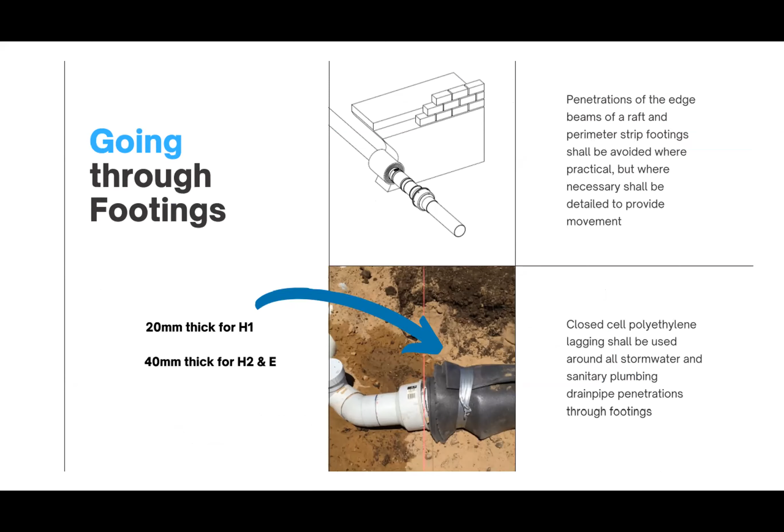And the other thing is going through footings. When you pass through a footing instead of just through open ground, they want 20 mil thick polyethylene lagging for H1 and 40 mil thick for H2 and E-class sites. So Appendix G has this diagram, which shows combination joints at the exit point from underneath the slab. Probably the big change that caught us all by surprise is now they show expansion joints on all vertical rises underneath slabs.

It was something that was never called for unless an engineer, for whatever reason, specified that they wanted movement on all vertical rises. But I think there's so many jobs going south right now because of moisture getting underneath slabs that it's led them to want movement in plumbing systems underneath slabs. So expansion joints to accommodate the vertical movement.

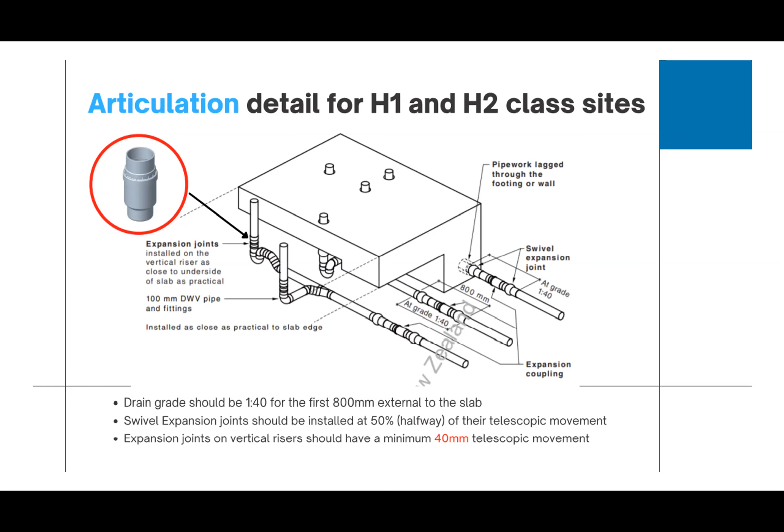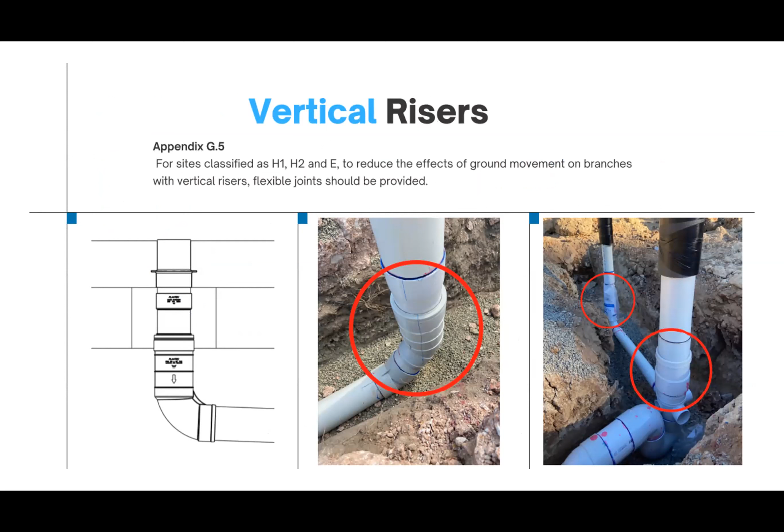When clay gets wet, it swells, so it goes up, and that's why they want to protect everything going vertically, and vice versa. When it dries out, it shrinks. So it either goes up or down. And that's in practice how they generally look. These products are put on the verticals: risers above the disconnector trap and floor waste riser, below things like pans, and at bases of stacks as well. And this is the second detail in the appendix, which goes one step further.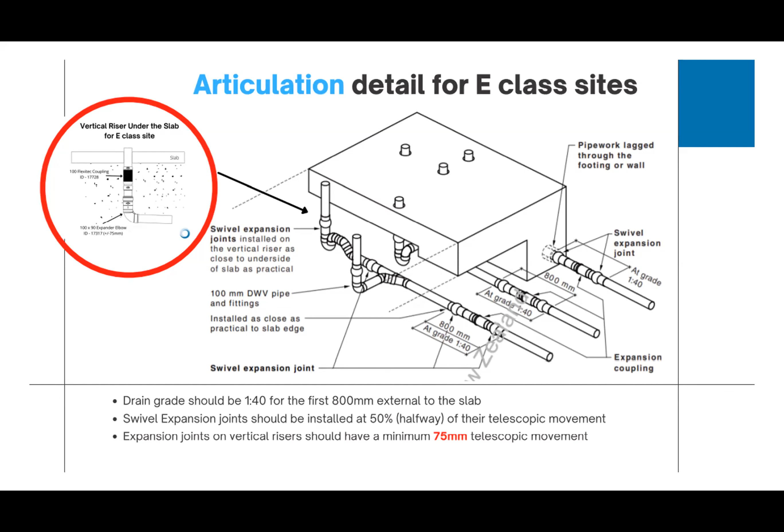And I can understand that on certain jobs, if you might be on a sloping block where you're going to get creep over many years, or instances like that. But generally on a clay site, you're going to get upwards and downwards movement. So I'm not too sure why they want to include deflective movement in that particular area.

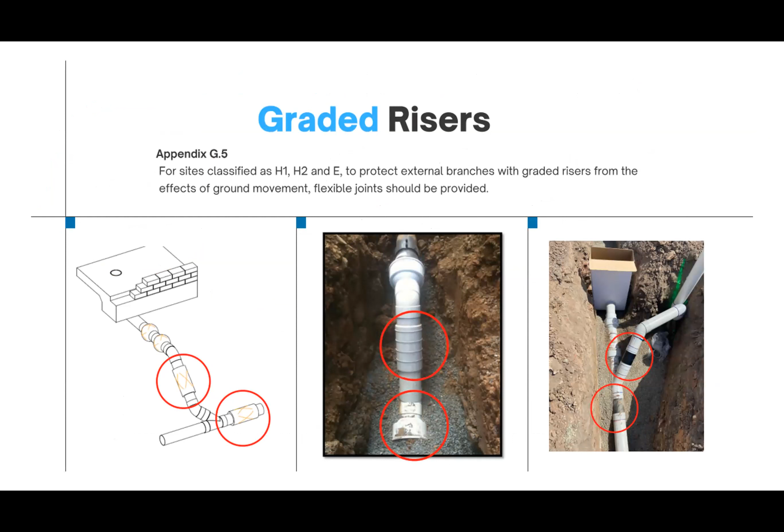It also talks about graded risers, so they want to protect graded risers as well as vertical risers. So any branches, they want to see things like expansion joints put on to protect from any movement. Tanks, common sense with tanks. Tanks are always going to move, particularly when you first put them in or when they're empty or when they're full, depending on what type of tank they are. But flexible connections or articulated joints on the inlet and outlets of tanks are just pretty much common sense, whether you're in reactive or unstable ground or not.

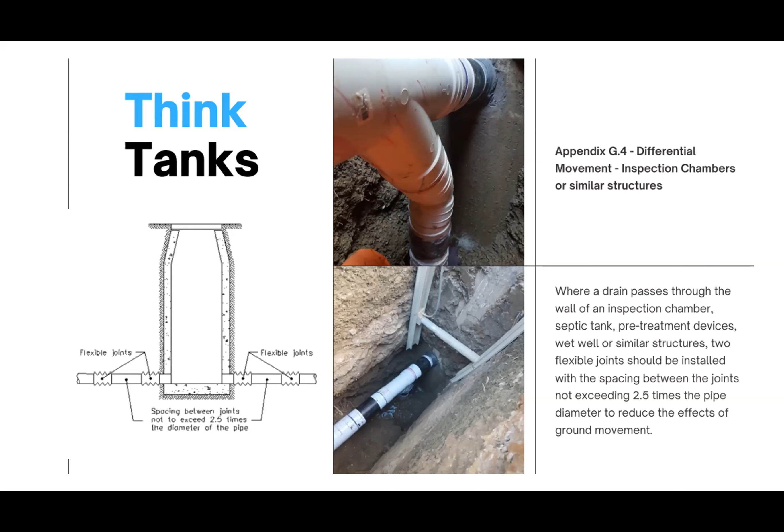And a lot of people forget about stormwater when it comes to this, but Appendix G specifically talks about stormwater as well. And it's often a knock-on effect because your downpipes are often your first to go because they're outside, so they're in the weather, they're in the ground that's actually moving all the time from season to season, from wet to dry. We often see downpipes break first, and of course, once a downpipe breaks, more and more moisture is in that area, close to the edge of the slab, makes its way under the slab, goes to the next available pipe, breaks it, and then it's just a domino effect, similar to what we saw with those townhouses.

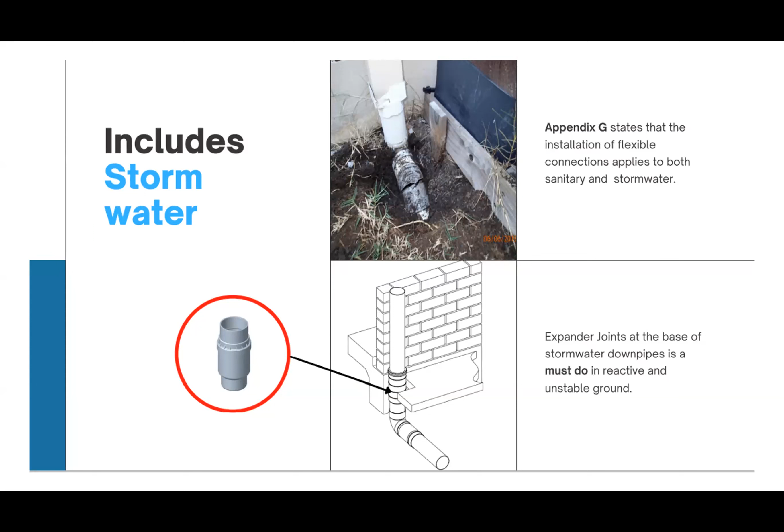Talked about water around the edges of the slab. It talks about drain coil and Stormflex, those flexible type products that are available to try and take water away. They've asked for those to be used 1.5 metres away from edges of slabs, and that's because if you're in a clay site and the clay starts moving, it tends to squash those things pretty quickly, and it just leads to more problems. So they don't want to see that flexible type of pipe anywhere near a slab. Pretty much common sense. And over the years now, we run all of our overflows from hot water systems and air conditioners into waste now, instead of having that dripping down on the ground beside where that unit was. So that's all changed.

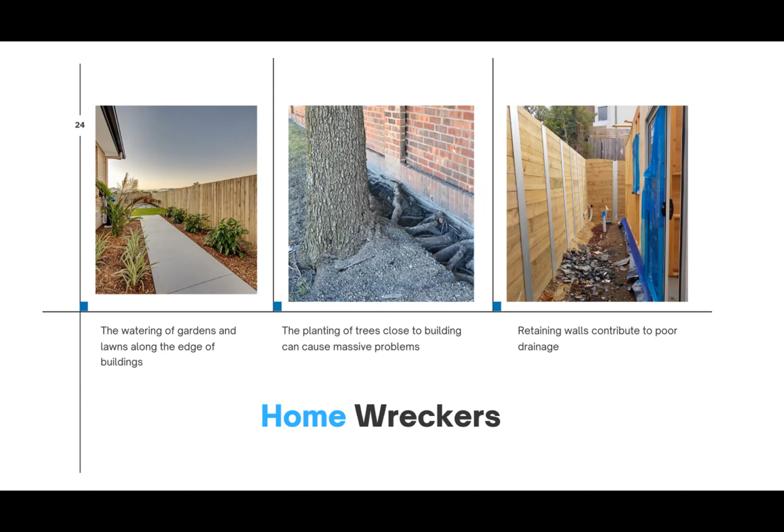But the biggest problem out there is the homeowner themselves. So when Mrs. Jones buys her house and she gets the keys, she knows she's paid a bit more for the slab probably, but she's not really told why. And therefore, homeowners do all the wrong things. They plant lawns and gardens right up to the edge and put irrigation systems there and pump a lot of water around the edges of their homes. They build retaining walls where they shouldn't, and they don't provide the necessary drainage that retaining walls need. And all of a sudden, you've got a corner of the house that is lifting up because of swelling, and they plant trees far too close to the edges of slabs.

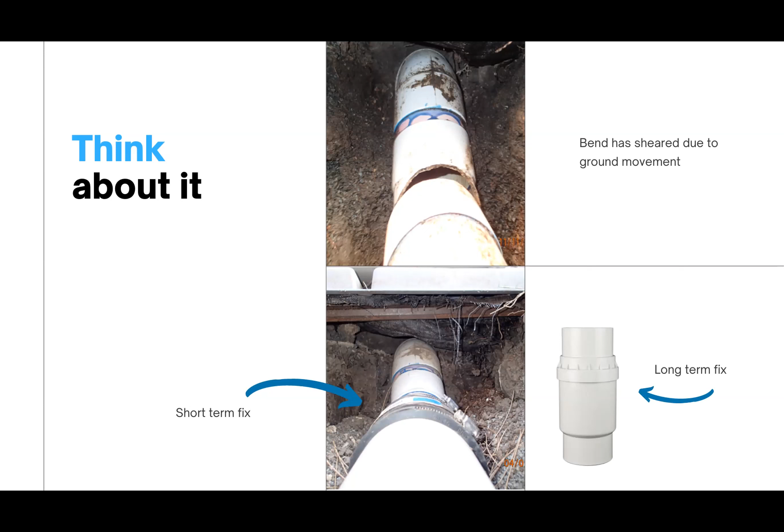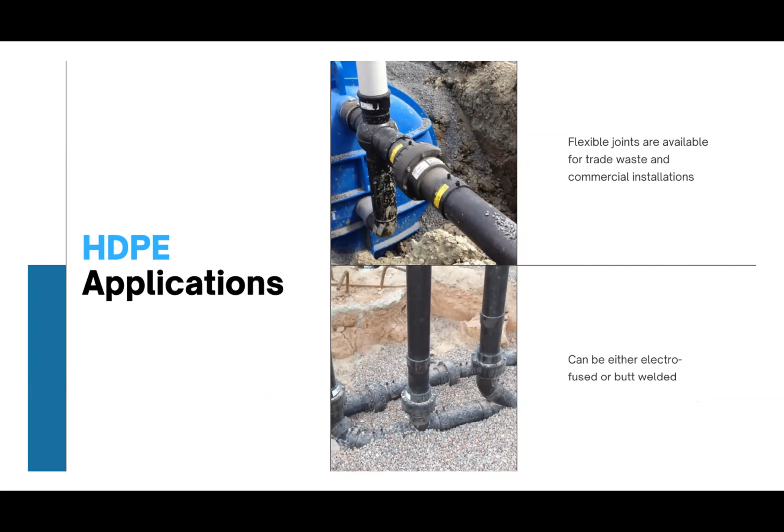Even maintenance plumbers need to be mindful when they do a repair. They don't know what the classification of the ground is, but they'll come along and put a cheap plumb quick on instead of doing something a little bit more substantial, and then within a year it rains and you're back to square one. These products are also available in HDPE as well. Not that you really need it so much for HDPE, to be honest. HDPE compared to PVC are two completely different materials, and they handle the stress of ground movement really well. Most drains in Europe are done in some form of PE or HDPE, and they have a lot of clay there as well, but they don't have the same problems that we have here. So it's a really good material for handling the stress movement.

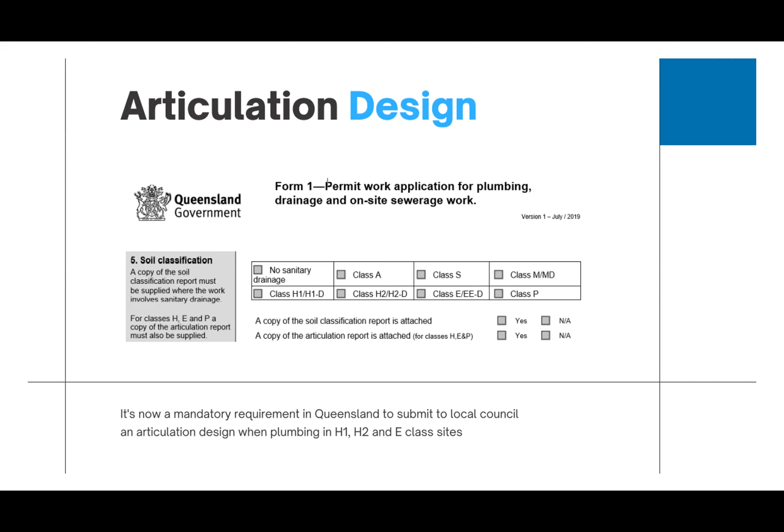Just quickly on what's happening here in New South Wales, and to compare it to where I'm from, when a plumber does a job there now, he has to fill this form out, which acknowledges that he needs to get the geotech report, and he needs to find out what the classification is, tick that box, and then he needs to provide an associated design to provide the necessary movement. So he needs to show that he's going to accommodate whatever movement of that site is by putting articulated fittings in or flexible joints. And I guess the big difference here, and this is why it works, that information then goes to whatever local council is there, and every single drain is inspected in Queensland. So the inspector knows before he goes out there that he's got a H2 class site, and he's seen the detail that's been submitted, and he'll walk around and ensure that the plumber has put all the necessary fixtures in to risk-proof that job.

New South Wales is starting to catch up with regards to that. So now Fair Trading released this just recently, which acknowledges AS 2870 and the use of flexible joints for drains in H1, H2 and E-class sites. It points out that Appendix G is only informative and not mandatory.

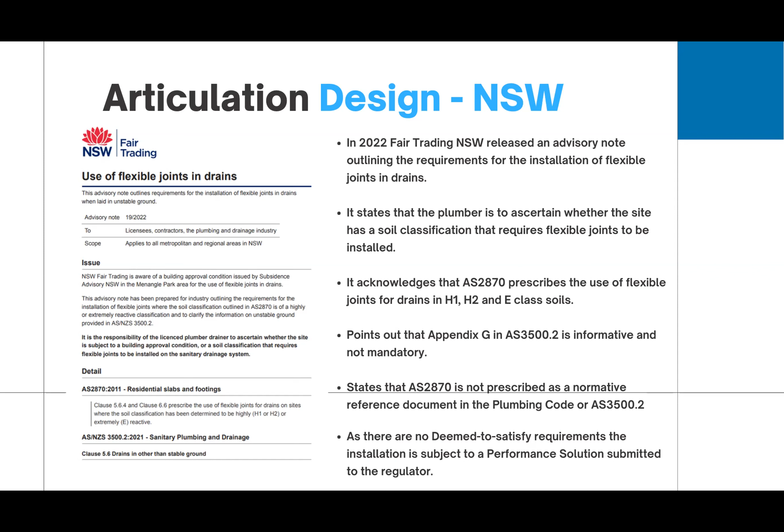So as a result of that, it's led to them requiring plumbers working in these types of sites to submit a performance solution, which obviously is an added cost as far as the build is concerned, because not only do you have to use these fittings, which cost money, but you've got to put in a performance solution for them as well. I know that the HCAA has got a really good template to be used, and there's another very good one from a company called Building and Legal Solutions. So there is a way out of this.

I was going to talk about seismic stuff because that's an area that we're getting into now. We're getting more and more questions about seismic design here in Australia. We've been working a lot in New Zealand with regards to that, but I'm getting the wind up now, so I might save seismic for a different time.

Yes, thumbs up. Cool. Questions?

The articulated fittings, should they be installed in a pit outside the building or just buried with everything else that's there? Buried with everything else that's there.

Anything else? Almost a question, come on. Silence is golden.